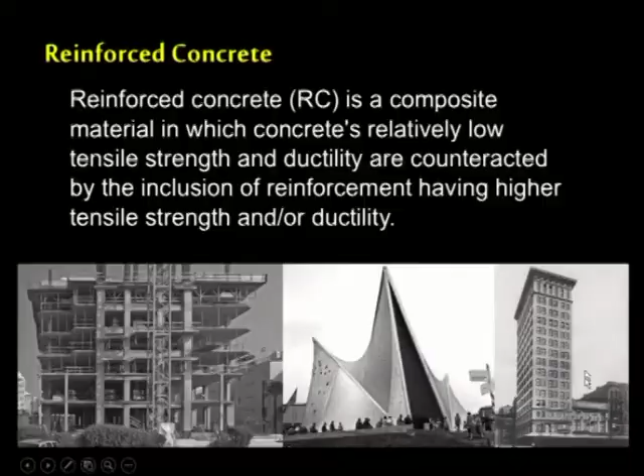But reinforcing concrete was a much later idea. Concrete has a very low tensile strength. While the compressive strength of concrete is relatively very high, the tensile strength is very low. To counteract the low tensile strength, you introduce another material which has a higher tensile strength, make it into a composite material, so that the compressive strength of concrete and the tensile strength of steel or iron or any other material combine to form a very good composite material. That is what we do in reinforced concrete, and let us trace the history of how reinforced concrete came into picture.

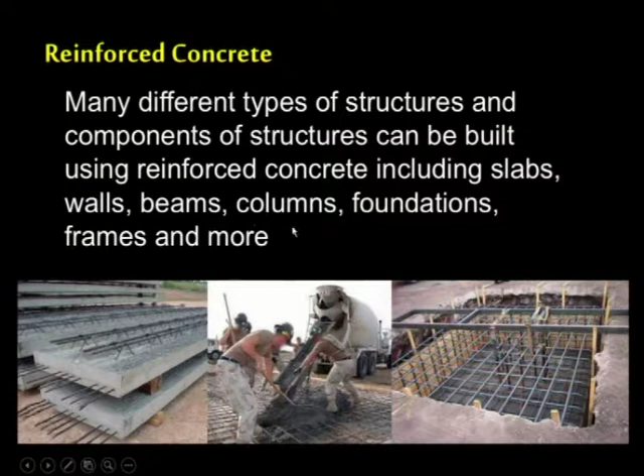There are different types of structures and components that can be built using reinforced concrete. You can build slabs, walls, beams, columns, foundations, frames. Not only these, we can also make buttresses, bridges, and a lot of other structures. Modern day tank holders and blast proof rooms are made of reinforced concrete. Soundproof, acoustically treated, fireproof rooms are also being made of reinforced concrete nowadays.

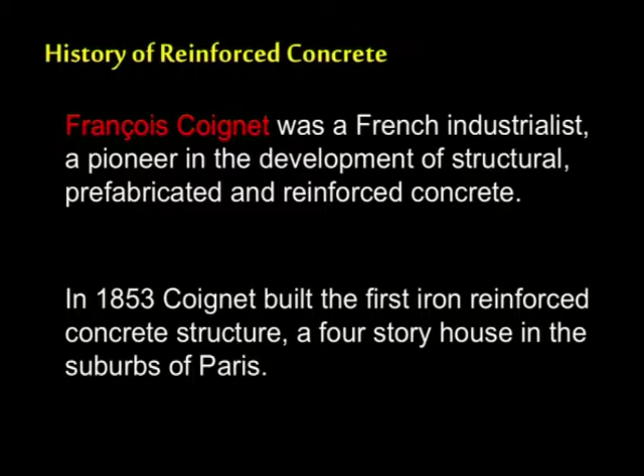Francois Coignet was a French industrialist. He was a pioneer in the development of structural, prefabricated and reinforced concrete. In 1853, he was the first person to build an iron reinforced concrete structure. He introduced iron into the concrete, and he built a 4-story house in the suburbs of Paris. He was one of the first people in the world to build a structure using reinforced concrete, as early as 1853, close to 165 years now.

In 1854, the very next year, William Wilkinson, an English builder, also reinforced the concrete roof and floors in the 2-story house he was constructing. He reinforced the slabs with iron which was available. When you position reinforcement, you don't put reinforcement bars all over the concrete. You put them in specific places. Understanding where to put them is what complex structural engineering calculations are all about.

You need to know how much reinforcement to put, and you need to know where the reinforcement has to go. Usually reinforcement is represented in percentage or in kg per volume of concrete.

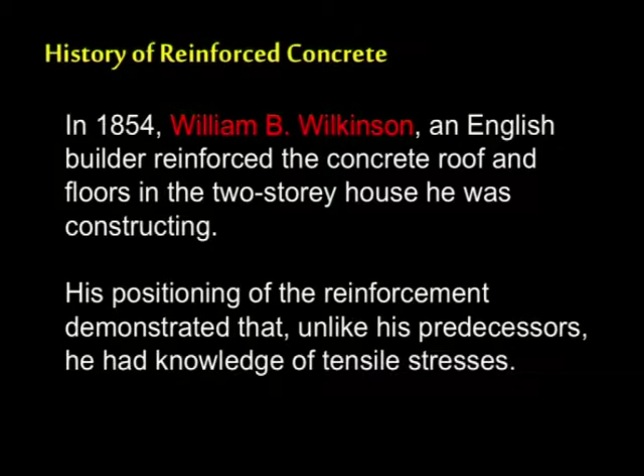When William Wilkinson positioned reinforcement in his concrete, it demonstrated that unlike his predecessors who previously constructed reinforced concrete, he really had the knowledge of tensile stresses. He really had the knowledge of how concrete works in tension, how concrete works in compression. He really knew the difference between the tensile stresses and the compressive stresses, and hence the positioning of his reinforcement areas was relatively accurate to that of the modern way of doing it.

Later, Joseph Monier, a French gardener, was granted a patent for reinforced flower pots by means of mixing wire mesh to a mortar shell. He made a normal flower pot, normal mortar shell, and he took a wire mesh, chicken wire mesh, and mixed the wire mesh and the mortar shell to form a flower pot which is very, very difficult to break.

He was a gardener, and he obviously had the problems of pots breaking during his lifetime. So he developed this idea so that the pots cannot be broken easily. Who knew this little idea of non-breakable flower pots could be the patent for reinforced concrete, revolutionizing the whole building industry at a later point of time.

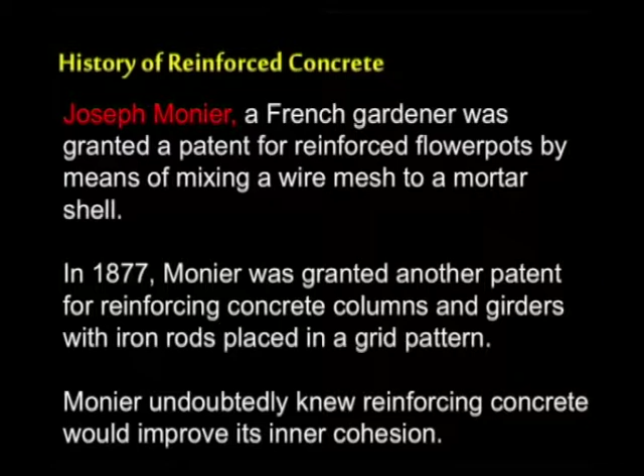In 1877, Monier was granted another patent for reinforcing concrete columns and girders with iron rods placed in a grid pattern. He started reinforcing all the columns and girders and all the thick piers with reinforcement arranged in a grid fashion. Not the usual way in which it is done now after complex calculations, but at a very rudimentary level he arranged reinforcement bars in a grid fashion.

Monier undoubtedly knew that reinforcing the concrete would greatly improve its inner cohesion, but what we don't know about Monier is whether he knew how much concrete, how much steel, how much iron, how much reinforcement material is required to make the whole structure very stable, for its longevity. We have doubts whether he had an understanding of all these activities in the first place, but he definitely knew that reinforcement in concrete will greatly improve its inner cohesion.

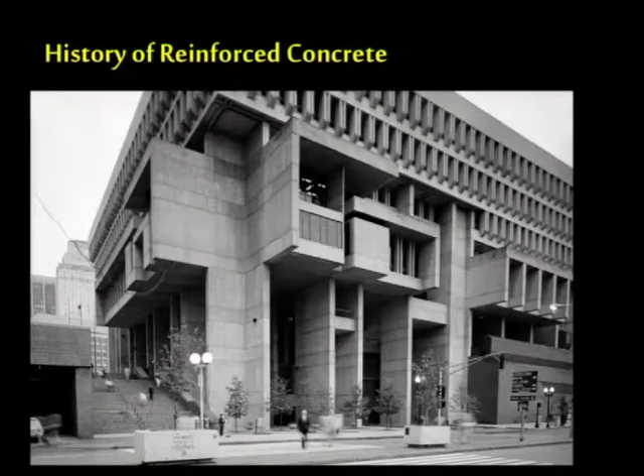From the early bare beginnings, we have come out to a great many things achieved in concrete construction. Brutalism was a great style which developed immediately after the World War to make sure all government buildings and all major buildings were done in a very, very quick fashion. The reconstruction of a lot of European cities, a lot of European public buildings, were of this style.

From the bare beginnings of reinforced concrete, we have come a long way, and it is time for us to recognize the people who led the campaign of concrete construction. In that series, we have two very great personalities whom we will be discussing in this lecture: Luigi Nervi and Robert Maillart.

Robert Maillart was a Swiss engineer who lived between 1872 and 1940. He studied at the Federal Institute of Technology, Zurich. Although he was not great in studies, he was not very keen in doing mathematics and calculations and other stuff in his engineering studies, he was rather fond of what he was studying.

He was rather brilliant at what he was doing, and he often said that the calculations and the mathematics made engineering a little too boring for his own good. He was very intuitive, and he always believed that intuition in structural design is a very important tool.

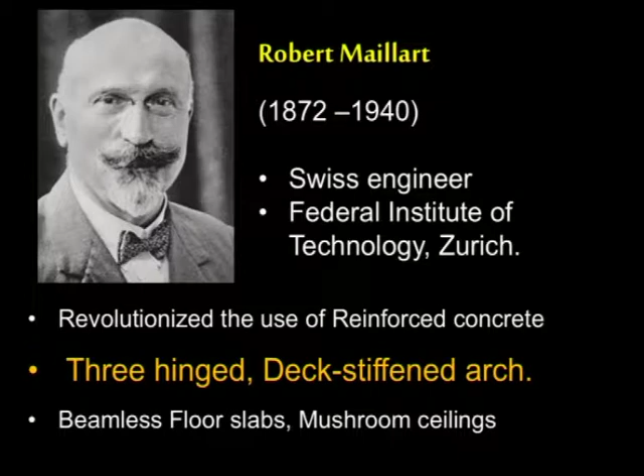He went on to use reinforced concrete in an extensive manner, and he kind of revolutionized the use of reinforced concrete. He changed the way arches were built, the way bridges were built. He invented the 3-hinged arches, the deck stiffened arches. He also invented beamless floor slabs, the mushroom ceilings for large granary kind of spaces, big huge spaces, and he revolutionized the way bridges were built during his time.

Let's go on to visit a few of his projects. The first project that we are looking at is Salginatobel Bridge in Schiers, Switzerland. This bridge was built in 1930.

This is one of the very famous landmarks in the country, and it is one of the few things that makes Switzerland the dream holiday destination for a lot of people. This bridge is also visited by a lot of designers, architects, and structural engineers ever since, because of its sheer genius. This bridge is completely made of reinforced concrete.

It's an arch bridge, and after about 61 years, in 1991, it was declared an international historic civil engineering landmark.

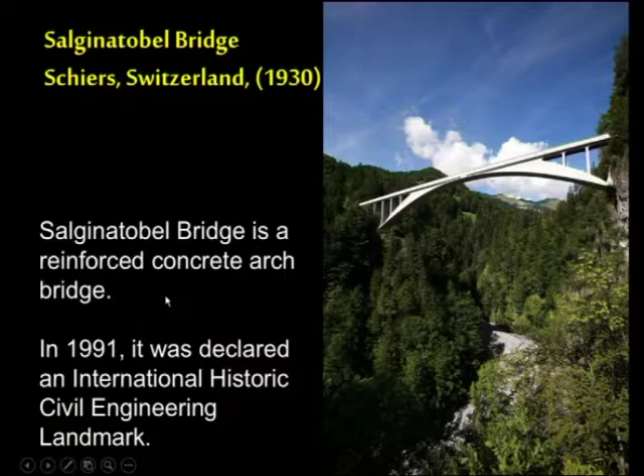Maillart also built a great number of warehouses and granaries, wherein you need a large amount of space to put all your grains and produce. So he designed huge volumes of spaces, and one of the methods he used is early reinforced concrete mushroom columns.

In the ancient period, we had column capitals, which were the means of transferring load from the slab to the column. In reinforced concrete, using monolithic engineering, he applied the same genius, using a mushroom capital to transfer the load of the slab to the column very easily.

Because of the use of mushroom columns, he understood greatly the stresses occurring in this area. The genius in understanding the stresses is what makes him special in history.

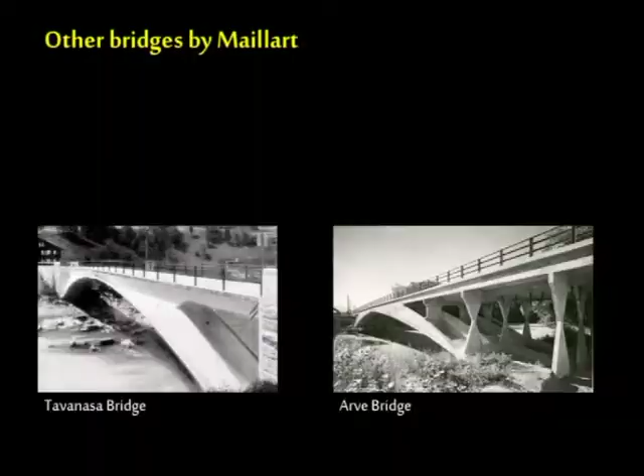Maillart was a genius. He was born in Switzerland and attended school in Zurich. Thereafter, he went to Russia, where industrialization was at its peak. There was a lot of scope for expansion and building, so he built a lot of industries and bridges in Russia.

After Russia came into communism, a lot of properties were centralized and seized by the government, including all his bonds and properties. He came back to Switzerland with no penny in his pocket and a lot of debt in the bank.

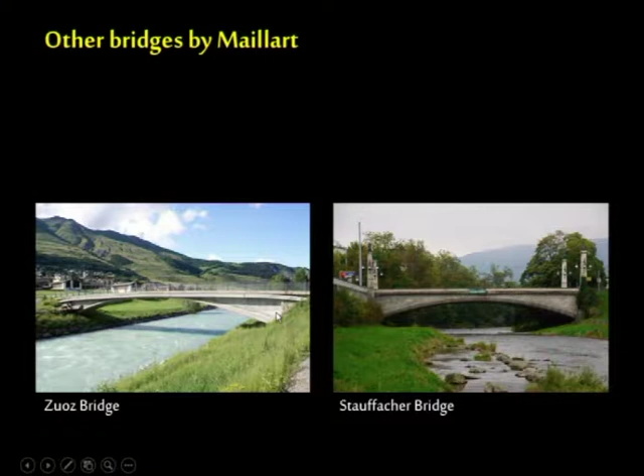Thereafter, he started building a lot of bridges and structures. His best works were yet to come after he came back to Switzerland, and these are some of them: the Zuoz Bridge and Stauffacher Bridge, both arched bridges. The shallow arched bridge shows the true genius of his work - the setting, the size, the proportions, everything looks sheer brilliance.

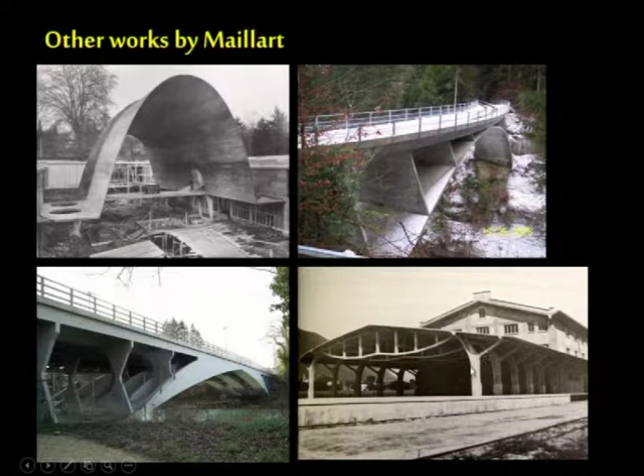A genius in creation. Next up, we have another famous architect and structural engineer, Pier Luigi Nervi.

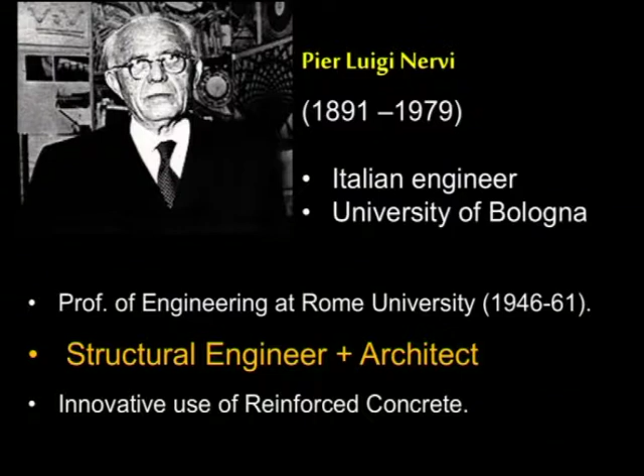Nervi was an Italian engineer, born in 1891, who studied at the University of Bologna. He was a professor of engineering at Rome University between 1946 and 1961, known for being a structural engineer and architect at the same time. He designed several buildings, both structure and architecture, and his innovative use of reinforced concrete took him to a whole different level.

Even though Luigi was much later in chronological order than Maillart - Maillart was elder and lived in a preceding period - Luigi's famous works include Stadio Artemio Franchi in Florence, Italy. This was one of the early stadiums he built, constructed in 1931, where he designed the stadium and the stands.

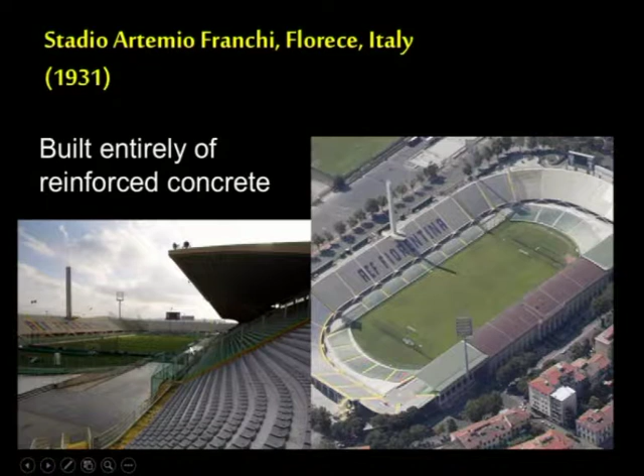Thereafter, there was a later addition to the stadium. There used to be a running track right here, which was removed and additional seats were built to accommodate more people for the football World Cup. This was a football stadium which also housed rugby matches and football matches.

The UNESCO World Headquarters in Paris was a combined work of three famous architects: Marcel Breuer, Bernard Zehrfuss, and Nervi. Nervi worked with Zehrfuss and Breuer to get this whole building done, and even though it was done by three different architects, there was also an entire validation team comprised of an international committee of 5 architects, including famous architects such as Lucio Costa, Walter Gropius, Le Corbusier, Sven Markelius, Ernesto Nathan Rogers, also with the collaboration of the very famous Eero Saarinen.

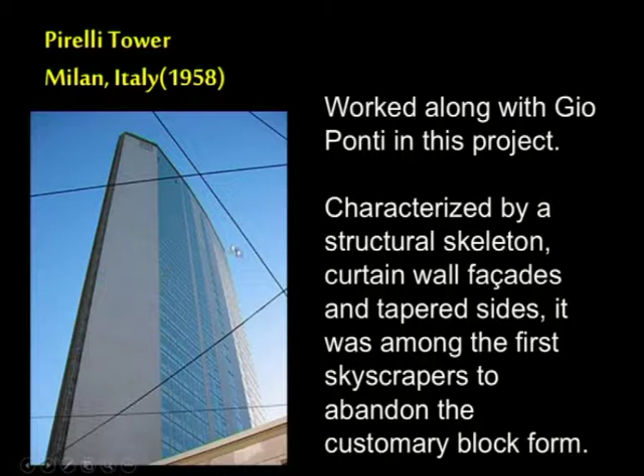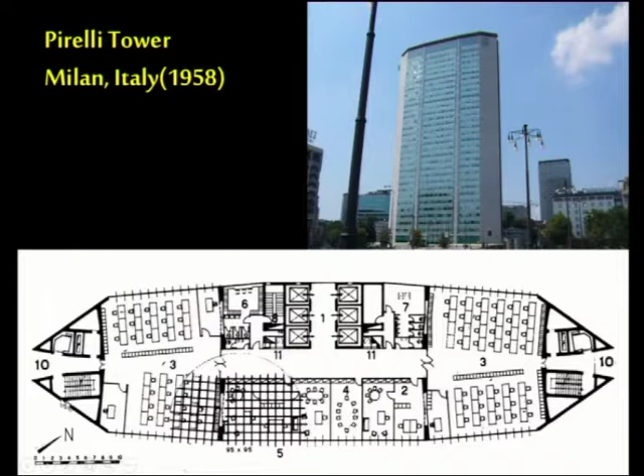It is one of the very first buildings that changed the way skyscrapers have to look, and it is characterized by this unique structural skeleton, curtain wall facades, and tapered sides. This is how the plan looks: the central part, the slightly tapering middle, and the greatly tapering ends, which house the staircase, lifts and other services. This is how the building looks.

Another interesting building which Luigi designed is Norfolk Scope Center. It's a cultural entertainment center in Virginia. It comprises an 11,000 person arena, a 2,500 person theater now known as the Chrysler Hall, and a 10,000 square foot exhibition hall and a 600 car parking garage.

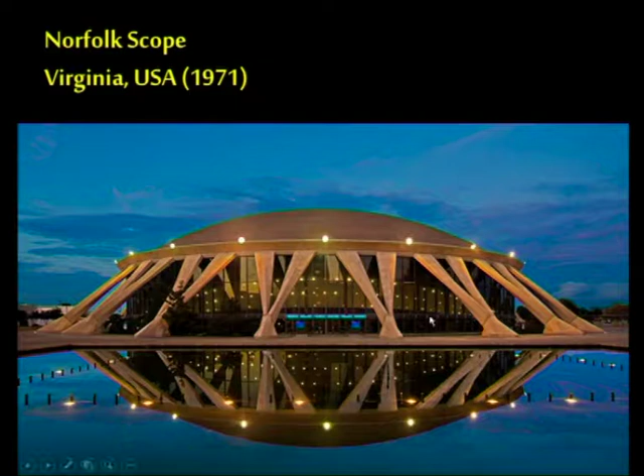Such a large building, and it also looks great. It was built in the year 1971. Along with the waterfront, the building looks simply amazing.

Look at the use of its external columns which fly out to support the central large dome that the building has. Some other pictures of the building from the interior and from the sky level, from the top. The use of single columns that support multiple beams takes the load and transfers it to the bottom.

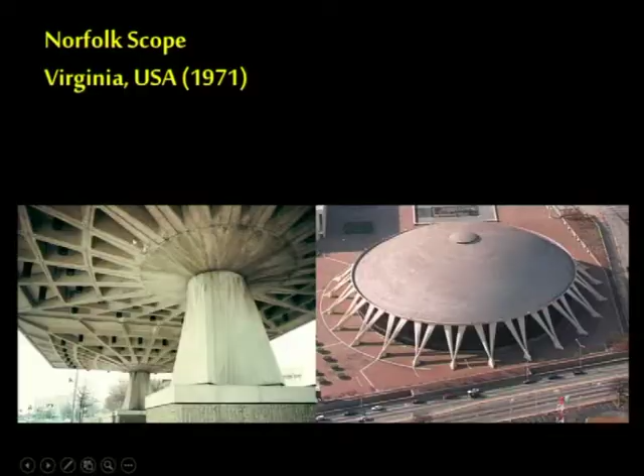Use of coffers. Here is a view of a single pier, which branches out into two elements, becoming thinner at the top, wider at the base, to take the load from the top and transfer it laterally onto the sides. In this lecture, we understood the complex early structural marvels made of reinforced concrete.

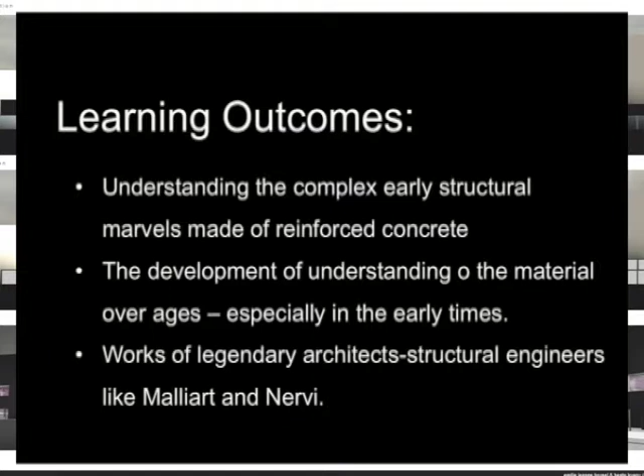We also understood the development of the material over the ages, especially during the early times when reinforced concrete was in its development stage. We saw the works of legendary architects and structural engineers like Maillart and Nervi.

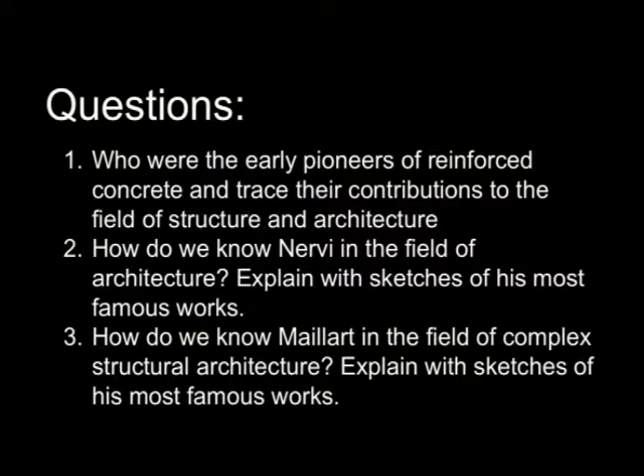These are some of the questions which you can try to answer by understanding the lecture. Who were the early pioneers of reinforced concrete, and trace their contribution to the field of structure and architecture? How do we know Nervi in the field of architecture, explained with sketches of his most famous works? How do we know Maillart in the field of complex structural architecture, explained with sketches of his most famous works?